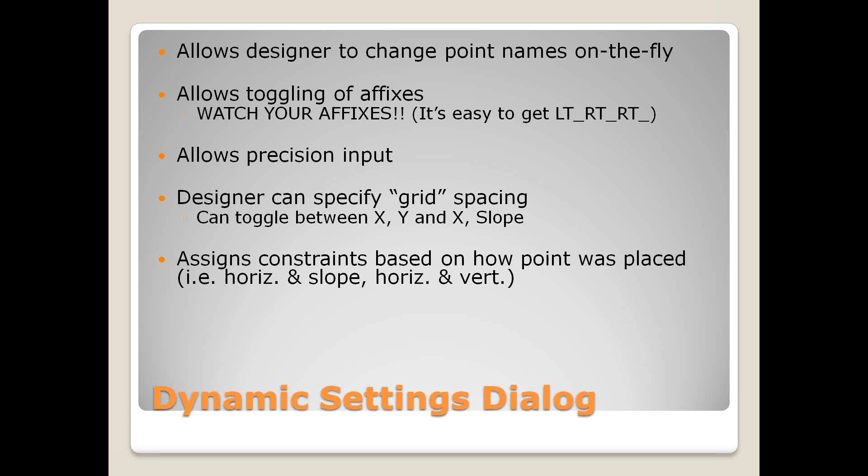So in the dynamic settings precision input, you can key in a specific XY from 0, 0, or DL, which is a delta X delta Y from the previous point. HS, horizontal and slope, keys in a delta X and a slope from the previous point. VS is similar, delta Y with a slope.

Now the OL and OS are actually going to be horizontal and vertical and horizontal and slope, but they're actually from the dynamic origin if you've got that set. And those two, the stuff that deals with the dynamic origin, do not set the constraints from that origin point. It's just going to be horizontal and vertical from the previous point.

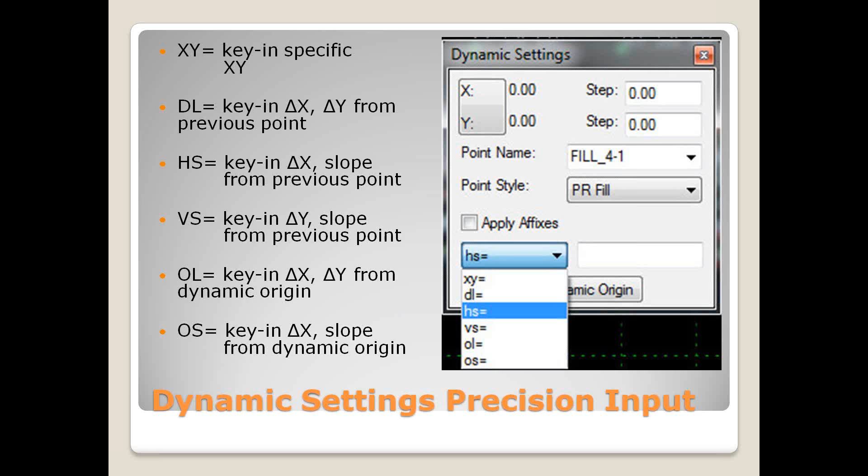So let's see if we can get in here. Let me find my, okay. So if I'm going to build a template from scratch, first thing I'm going to do is I'm going to open up my dynamic settings. So there's a little box down here at the bottom scroll bar, or you can go to Tools, Dynamic Settings, and there's that Dynamic Settings dialog box that I've got.

Again, you can snap to a grid up at the top. If you click on that XY, you can change it to horizontal and slope. Then you've got your point name, which if you drop that down has all the point names in the list. And as we change that point name, you're going to get the associated style already. And then you can apply affixes and do precision input if you'd like to.

So we'll just go through creating some components real quick. I'm just going to deal with these first three, the simple, constrained, and unconstrained. The simple, what it's going to do, it's just going to place a block at a specified width, depth, and slope. So I can change that if I wanted to do my center line. There's my center line. I'll give this an asphalt name. Make sure I set my style here. PR asphalt surface, we'll give it that.

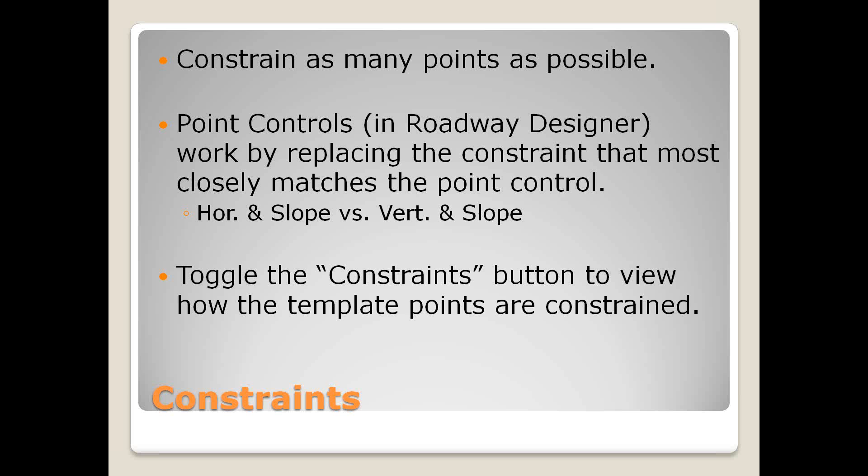So let's go back in here real quick. This is just that ditch that Wendy was talking about. This point down here, this ditch foreslope or ditch front, if I edit that point, it's constrained by slope and vertical. So another little trick if you want to see how it's going to work is to test the point control. If we're going to control that vertically, let's test the vertical point control. Let me turn my step off. It allows me to see what a vertical point control would actually do to that component.

So if I come in here and I change that to horizontal and test that vertical point control, you can see it's honoring that horizontal, but it's changing the slope, because the slope's the only constraint that has any aspect of vertical control in there. So you want to be aware of how this is going to be used down the line and build your constraints appropriately so that it's going to perform the way you intend.

So I'll change that back, and then also up here under the display box, kind of at the top towards the middle, you can display components or you can display constraints. So if I turn on the constraints, you can see how all the points are constrained to one another. If you see this straight vertical line, that means that there's a vertical constraint, and if you hover over that point, it'll highlight where that point is constrained. So that DFS 4:1 is constrained vertically.

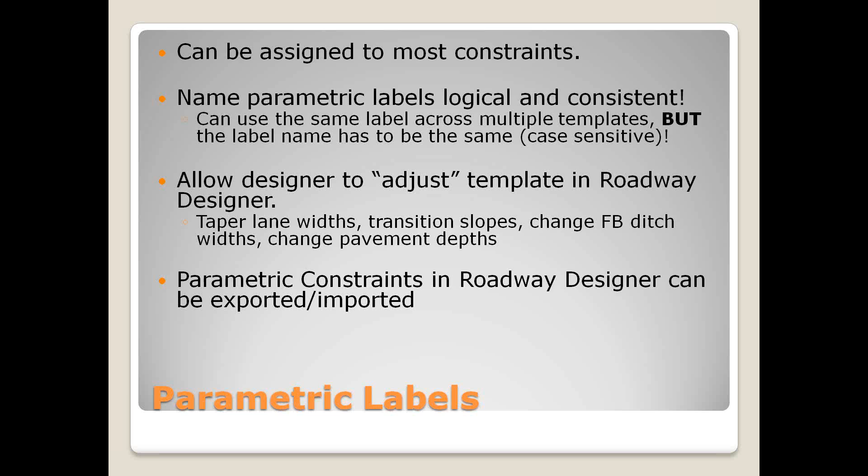You can change your ditch widths or pavement depths. Anything that has a label assigned, you can change directly in Roadway Designer. And a side benefit of that is the parametric constraints can be imported and exported from Roadway Designer. Point controls, you don't have that functionality, but with parametric constraints you do. So let's go in and do a quick demo on that.

And I'm just going to show you one of our example templates, the 2-lane rural. Let's turn the components back on. Let's just go to this right EP. So we have a parametric label down here at the bottom. So we have a slope constraint and a horizontal constraint. On that horizontal constraint, we're saying that's the right lane width. So if we wanted to change that from 12 to 2 or 12 to 14 or whatever, we can change that on the fly.

Also, if you pull this down, I've got the slopes. That's listing every parametric label that has a slope aspect to it. So the ditch back slope, I have all these parametric labels set up in this template. And that's one thing. You're only going to get a list of the ones that are in the active template. So if I go to my horizontal, I actually get both horizontal and vertical because I guess it's a linear thing rather than a slope thing.

But you can pick that up and say if I wanted to go to the bottom of my surface course, got my asphalt surface depth. So I can assign that to every point along the bottom of that surface. And if I needed to change that, I can. So I've got another template in here that I drew up this morning that if I come in here, I actually don't have any labels set up. So I have no horizontal vertical labels and no slope labels.

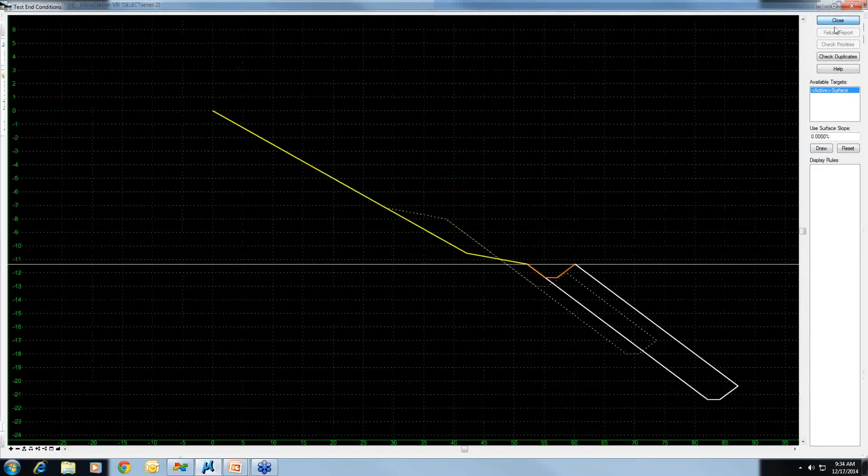Here I've got his component, which that white component he had turned off, but that's the end condition. So that's what's actually solving. And then this orange ditch is just a normal component that's actually a child of that ditch. So if I went to test, you can see that that white ditch is solving, so it's showing the orange one. But if I come in here and take that end condition's infinite off,

let's change this real quick. See, at 0, I must not have done something. Ooh, that's pretty steep. So there it's solving. But now that end condition fails, so that orange ditch, which was a child of that end condition, is not displaying. So that's a real quick way to control the display of particular components.

Another way is by using display rules, but be careful. Display rules, you can set up rules to control whether this component is displayed. You can compare two different points in the template to see if it meets certain criteria, and if it does, you can say, okay, if this happens, I want it to display, or if this doesn't happen, I want it to display. Something like that.

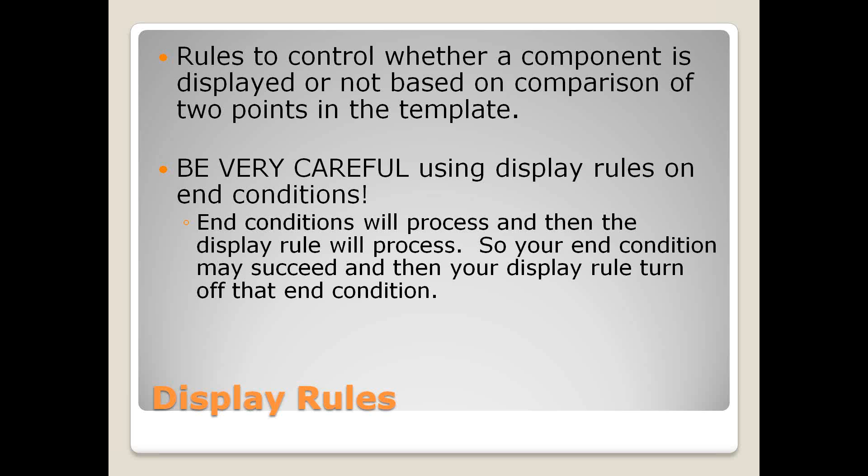Caveat, be very, very careful using display rules on end conditions. This one took me a while. It's because I know my end condition is supposed to solve, but it's not showing up. Well, what happens is the end condition processes, and then the display rules go through and process. So your end condition may have succeeded, but your display rule came along behind you and turned it off. So you want to be very careful with display rules on end conditions.

I don't really have an example for that, but I'll show you how you can set them up, and maybe later on down the line we can do a specific webinar just on display rules, because they are pretty complicated. I just went to the component properties, and under display rules I clicked edit, and it brings up this conditional expression dialog box. So I can make any conditional expression I want up here at the top using rules from down at the bottom half.

So template display rules would list all the display rules that are occurring in the template. So if I wanted to add one, you can set up a rule whether a component is displayed, and that's going to be really similar to a parent-child relationship. The only reason I think you'd want to use that is to display a certain component when another component isn't displayed, because otherwise, if you only wanted it when it was displayed, you'd use a parent-child, but that's for another day.

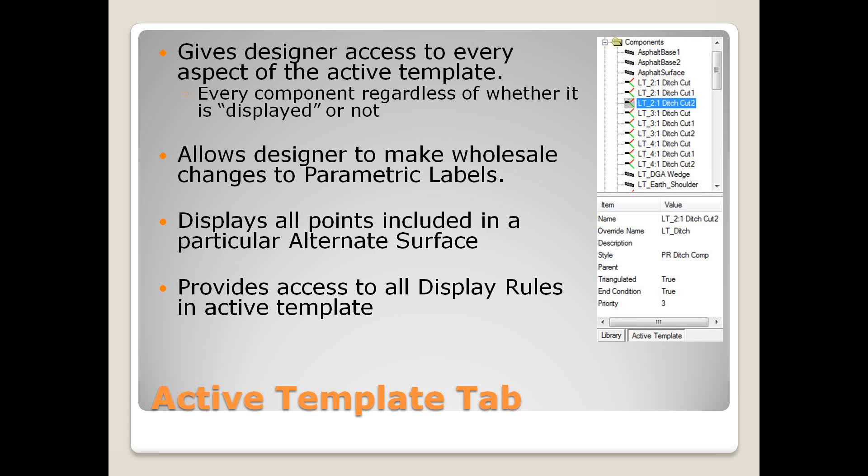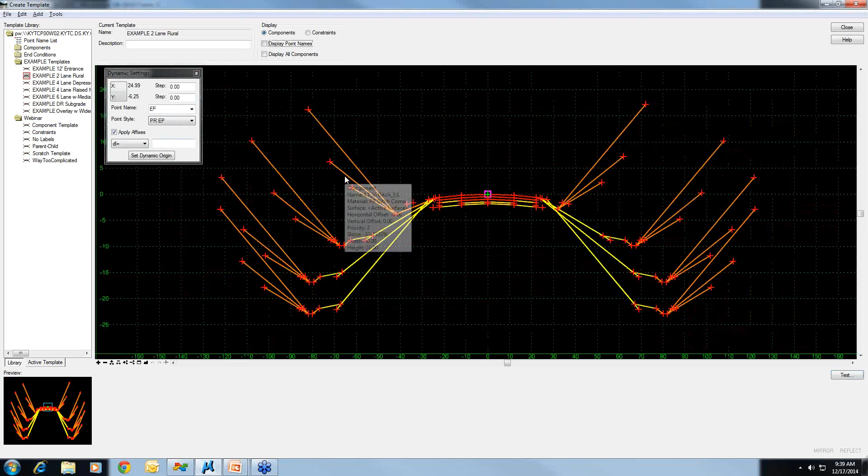So we'll go back to our example template, because I know a lot of those have parametrics and stuff already set up. So I just turned off the point names so you can see a little bit better. But if I go to this Active Template tab, it's down here along the left-hand side at the bottom. It gives me access to every point that's in that template. Whether the component's displayed or not, I can edit it.

Also, it gives you access to all the components that are in that template. This is really the only place that you'll be able to tell what your components are named without editing every single component. So to make sure that you don't have any nasty affixes at the beginning there, use this to go through and check that out.

It also gives you end condition branches. So I have end conditions starting at the right earth shoulder and the left earth shoulder. So if I wanted to look at the right, coming off the right, I have these end conditions. And then coming off this right fill point, I have more end conditions. So it's kind of showing you how those end conditions are built.

If I had display rules in there, it would show me those. None of the example templates have display rules other than maybe the subgrade example, just because we wanted to keep stuff kind of simple.

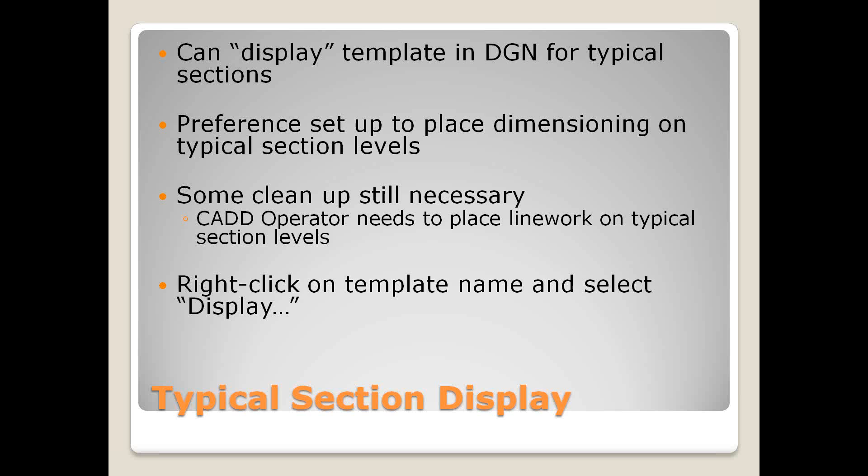So you can just right-click on the template name and select display. So let's go in and do that on this template. This is our example 2 lane. So I come over here under my template list, right-click on that name, and down at the bottom I have display. So if I click display, it brings up the display template dialog. So we've already got a preference set up. I'll go on ahead and load that. And that is available in the latest CAD standards, I do believe.

And the only thing you need to pay attention to is, let me see if I can make that bigger there. If you can see that, you can see the backbone is drawn in solid lines. The end conditions are kind of dotted. That allows me to select certain end conditions by clicking on them. Right like that. So I'm going to show my cut on the left and my fill on the right.

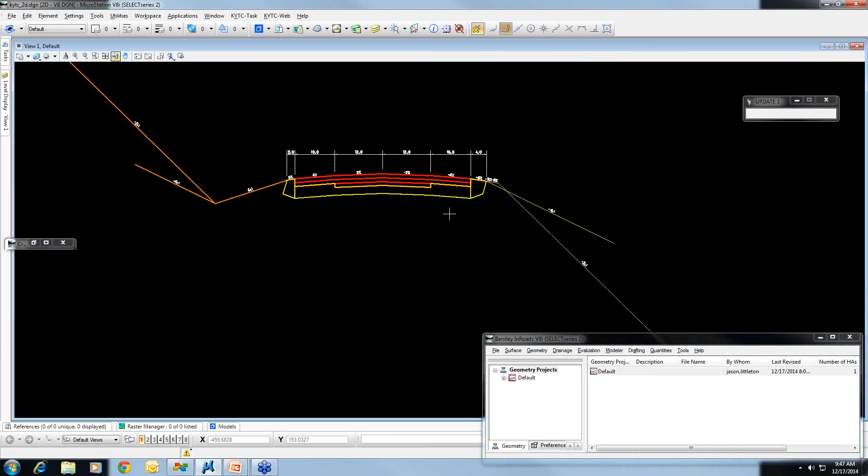Click apply and select, and my scale's off, so I'm going to undo that and set my scale real quick so that I don't get huge text. And I'm just going to do a 5 scale. So if I hit apply now, I'll close that and I'll minimize that. You can see it's gone in and drawn my template for me. And you see I changed that right over shoulder to 4 foot, so it's dimensioned at 4 feet.

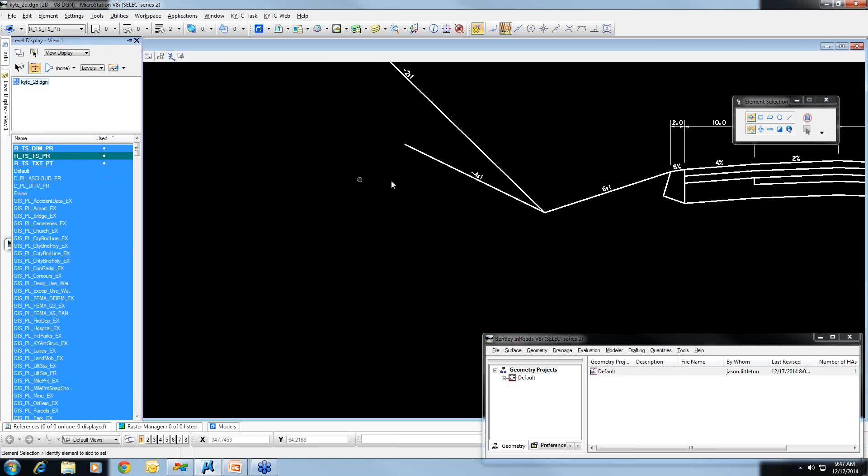So what I can do at this point is just turn off the dimensioning and the text style. I'll select all those and put that on the typical section, the appropriate level. So I can just, and then turn everything back on. And I just need to do a little bit of cleanup to get it to where I want it to be. But that's going to do a lot of the footwork for you.

Okay, the last little piece we got, you can actually do everything that we did in the ITL, you can do in each individual template in the IRD. So you can make these edits directly in the IRD. I don't know when you'd want to do that. It doesn't make a whole lot of sense to me, but the capability's there.

It seems like the potential downfalls don't make it worth the risk, because if you make your edits in the IRD, they can be overwritten when the template is processed or when the template is synchronized with the library. So all that work you just did in that template is gone now.

Also, it can make it a little bit more difficult for people to follow your work, because I may pick up and say, oh, well, that's not in sync with what's in the ITL file, so I'm going to synchronize, and now I've lost everything that you've done. One good thing is you can copy your IRD edits back to the ITL file through the template library organizer. So just me personally, I like to make my edits to the ITL file rather than doing it in the roadway designer. So that's the end of what I have.

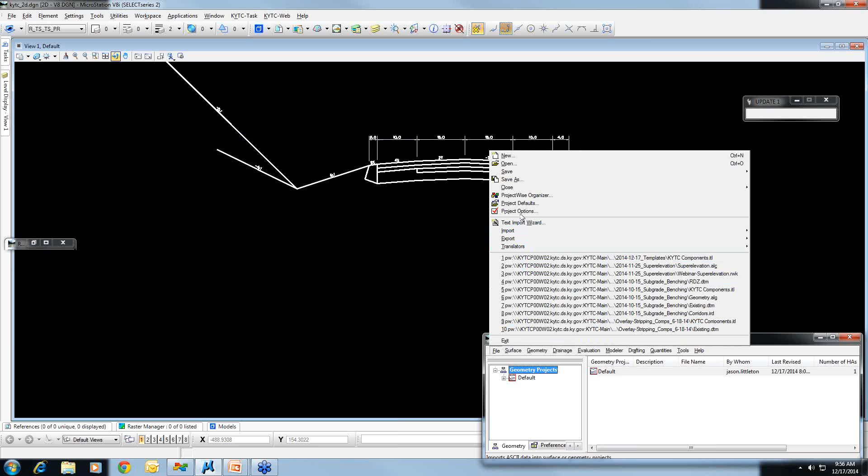How do you transition the slopes with parametric constraints? Okay, the slopes, I don't really have an example per se, but let me set one up real quick. So if I go in my RD, let me see if I've got something where I can load up an ALG real quick. Let's see. There we go. I think that's going to be everything I need. Okay, so if I come in here and set up, I'm just going to delete these real quick. And I'm going to set up a new corridor. I'm going to add a template.

Well, shoot. Maybe. And so if I just come down through here, you can see it's 3 to 1. There it's 4 to 1. There it's 6 to 1. So say maybe I want to go from 105.50 at 6 to 1 to 106.50 at 4 to 1.

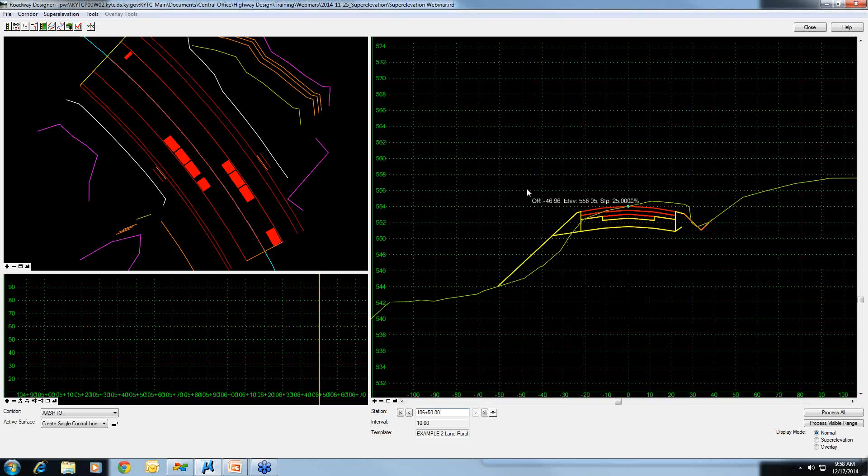So what I can do, because I've got that constraint set up, in your roadway designer, go to Tools, Parametric Constraints, and I've called that one left slope. So I can select that left slope. I said I wanted to go from 105.50 to 106.50. And I want to go from a 1 to 6 slope to a 1 to 4 slope. And you can see that at 106.50, I'm at 4 to 1.

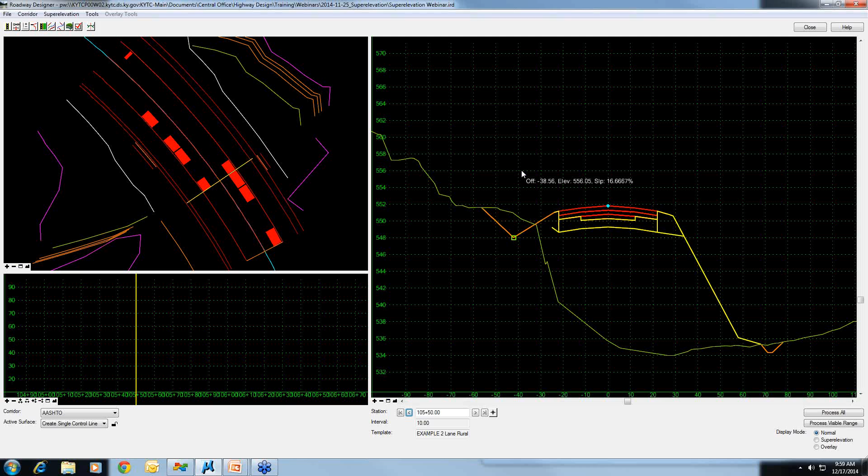At 106, I'm about 5 to 1, which really what I'd do is I'd go from 105.50 to 106, and then 106 to 106.50. But you can do the entire transition because it's actually transitioning the slope percent rather than the 4 to 1 or 6 to 1 or whatever. And you can see once I get back to 105.50, I'm at 6 to 1. So again, that's probably my favorite parametric constraint, transitioning that slope. So I hope that one answered your question.

And then we have one more about how do you create your own point names. What you can do is you can double click on your point name list, and it'll bring up the entire list, and I've lost mine. Let me see if I can find it. Okay, there we go. So there's my entire point name list. I just double clicked on that point name list.

If I wanted to name one, let's call it point name, and I wanted to give it a certain style of PR disturb limit, I can add that in there, and there's my new point name. So that's how you would create your own point names. Again, if you have suggestions, send them to us so we can get it incorporated in ours, so we can have some consistency at the end.

How would you add the 2-to-1 slope for guardrail condition without overlapping your unpaved shoulder component? At that point, if you had, let me come in here, I think it was this one. Oh, that's one thing I forgot to do where I was copying my labels. Just go back in and delete all your components, which I'm sure I'm going to miss some, but yep, sure did. But go in and delete them. Otherwise, if you apply that template to your corridor, it will show up.